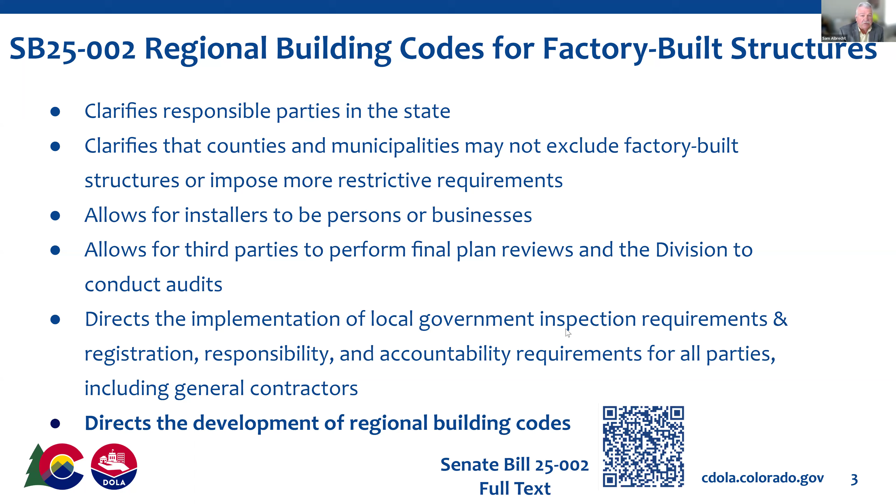Now, why are we here today? This is the biggie of the whole reason behind this legislation, and that is to direct the development of regional building codes. As you know, the state has about 320 different jurisdictions. Every local jurisdiction has their own wind load, snow load, and authority to approve that.

What we're trying to do is group those into common regions that allow the manufacturers to develop a single plan set, or a few multiple plan sets if they want to build into different regions, for an approved plan, right? Before we tied plan approval to a specific address, that's going away.

We will still require when that unit is built and delivered that a plan set is delivered to the state.

But again, with a third party, if you have a unit that you want to use in multiple jurisdictions and it meets the regions we're proposing, it can be used in a number of different locations, and you don't have to get it reapproved for each specific location. You've got it approved already by your third party agency or by us, and then you're ready to go.

Now, the design criteria for each region must include at a minimum wind shear, snow load, wildfire risk, thermal zone, radon mitigation, and automatic fire sprinkler system. So the devil's in the details, and we've been working a lot on this. We're going to show you a mock-up of what we think these draft regions are going to look like going forward, and then we're going to ask you some questions about where to draw the lines.

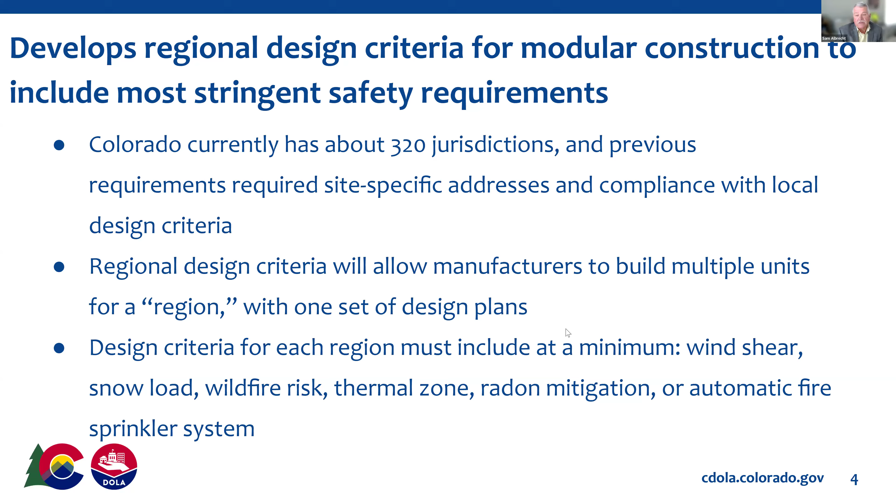Now, the Technical Advisory Committee is made up of 19 experts. They represent a lot of different sectors, and I'll show a slide on the different sectors they represent. The Division of Housing, that's me and Donnie and Heather, sitting back here working like ducks, looking calm and cool on the exterior and paddling like crazy underneath. That's what we do. So we've been working with the TAC very closely, proposing a lot of different options and collecting the information and the data.

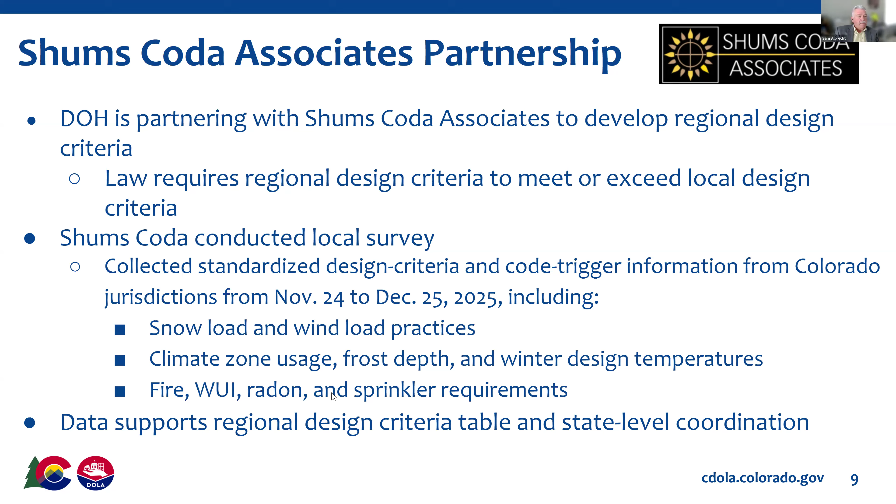Good morning, everybody. My name is Donnie Featherman, Program Manager for the Building Codes and Standards section. I monitor anything that comes into the state of Colorado that's factory built. So what I'm going to do today is just go over this table and then some of the footnotes that go along with it, and some of the data that was collected as part of the creation of this table.

But just real quick, to clarify, as Sam was saying, we're not creating regional codes. This is more of a regional design criteria table. We are going to have one code, and depending on what we do adopt, it looks like we're going to adopt the 2024 building codes, but that might change. It just depends on the feedback we get from the industry, and also feedback from TAC members, and then we'll see what we're going to do, at least with the code section. So the idea is to either adopt the 2024 building codes or possibly stay on the 2021 building codes.

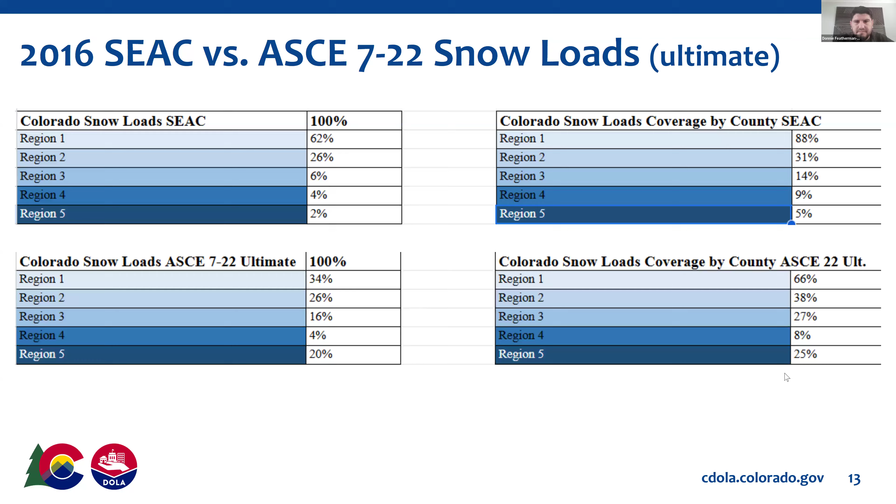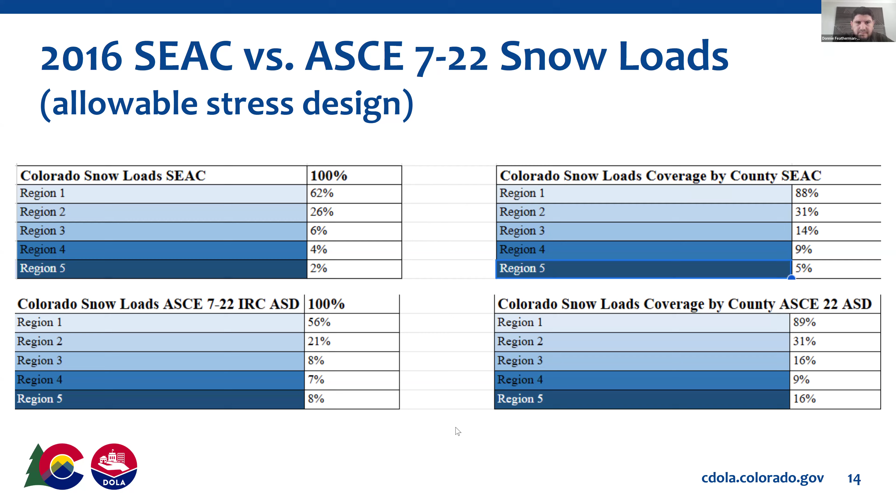So basically this is showing that a majority of the construction that has happened in the past couple of years fits within region 1, but you can see that it somewhat aligns with the data that was collected. A majority of the data collected shows that most of those points are in region 1, which correlates with the amount of approved commercial plans being in region 1 as well. When you compare the two tables, the way they're laid out aligns with the production models coming through to Colorado from the industry.

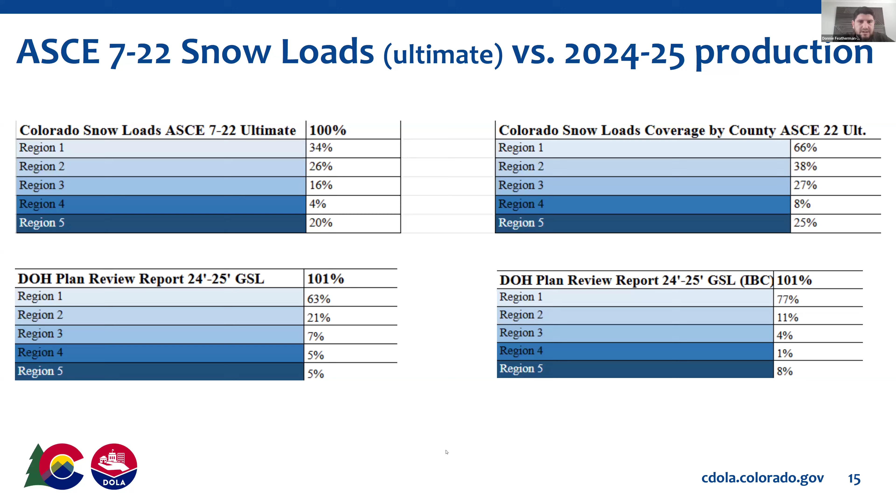So just for clarification, this is based on the past 2 years of production. Maybe industry demand is different, maybe there's going to be a lot more region 5s in the future, it's hard to say. But based on historical data, at least the past 2 years, the majority of construction is going to be in regions 1 and 2, based on the format of the table we currently have. This is just for snow loads though, just want to clarify that as well.

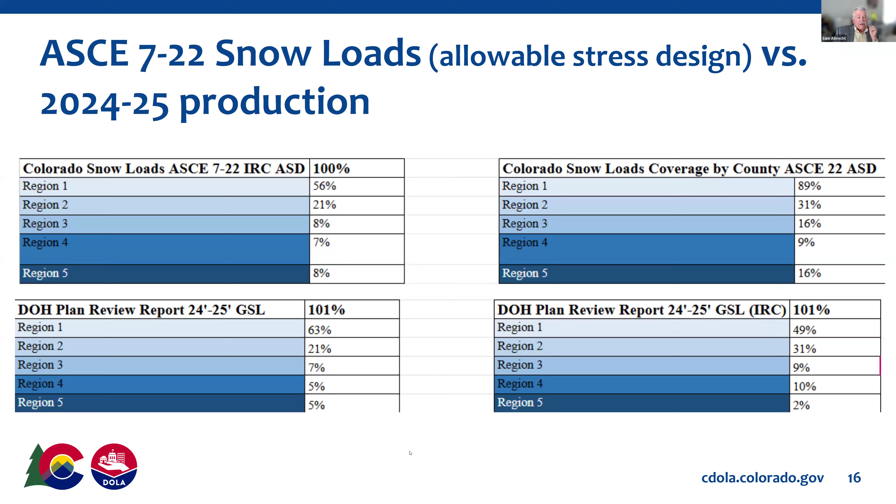So I've been trying to make some responses in the chat. Tracy, you had your hand up though. Do you want to just make your comments real quick or questions?

Nope, I'm good, I'm processing, Sam, because this is a lot for us tiny house folks. I guess I do have one question on wildfire mitigation. Correct me if I'm wrong, but didn't we discuss tiny houses being exempt because the square footage was less than, was it 300 or 400 square feet? I don't remember, is that not correct in my memory, Donnie and Sam?

We'll have to go back and look at that code, but I don't think there was an exemption on size there. Yeah, only the Colorado model solar and electric ready has a size requirement, which is the 600. Solar. Yeah, you're right, you're right, you guys. Okay, I'll just hush for a moment, I need to process. All right.

Trying to pick out questions based on a common thread here. If you would like to get your question answered, raise your hand or shout it out real quick. Sorry guys, I was trying to find the button for the hand but I couldn't find it. So I just jumped in. All right, the hand button is under the chat feature, I think. No, I don't know where chat is. Heather, help us out.

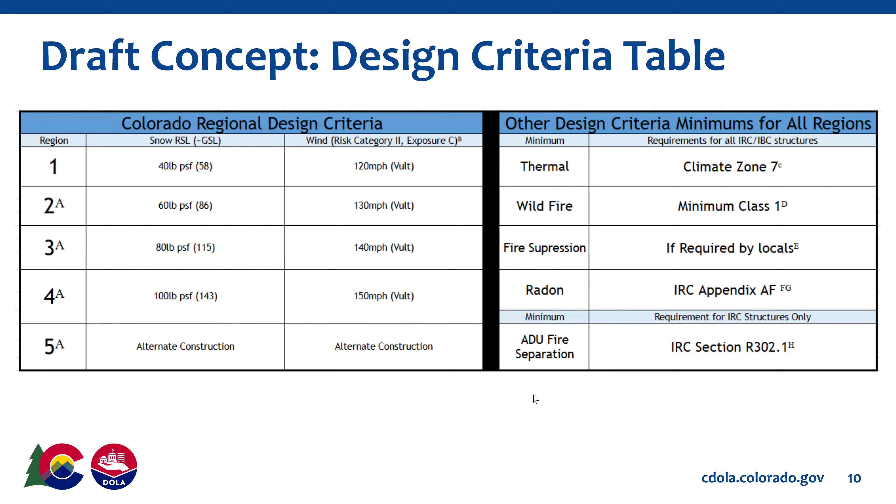Yeah, I just want to make sure, under the other design criteria minimums for wildfire, that footnote D was saying that you could have an approval without class 1 requirements. Yeah, as long as that locale does not have a classification of 1 or 2.

So what we're planning on doing is adopting the Colorado Wildfire Resiliency Code map. So you would be able to use that as reference, and if that specific location that the building is going to does not have a risk category, then you can design it to go to that location without it.

Also, you would have to check the local amendments because they might have an approved amendment that allows for a 0 classification. But how do you express that on the approval then, since it's not site-specific? Let's say you're only designing for a 0 classification, then you would just have to specify that the structure is only going to locations that have a 0 classification.

Okay, thank you. I think it's just going to be a little difficult. Have you looked at the current map? Yes, I have, and I started to check with local authorities on what they have or don't have. Yeah, a lot of locals have not adopted a WUI yet, so that might be a little difficult.

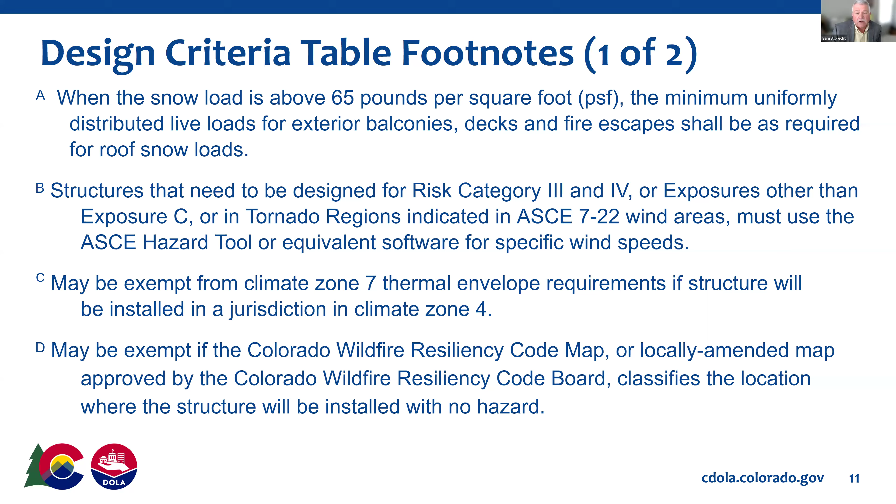Donnie, I want to cut you off. I want to go through those questions real quick and then do that schedule slide where I show everybody our timeline, okay? So please, if you have questions, email us or get the question to us and we will try to factor that into the next round of this. But I just want to go through again.

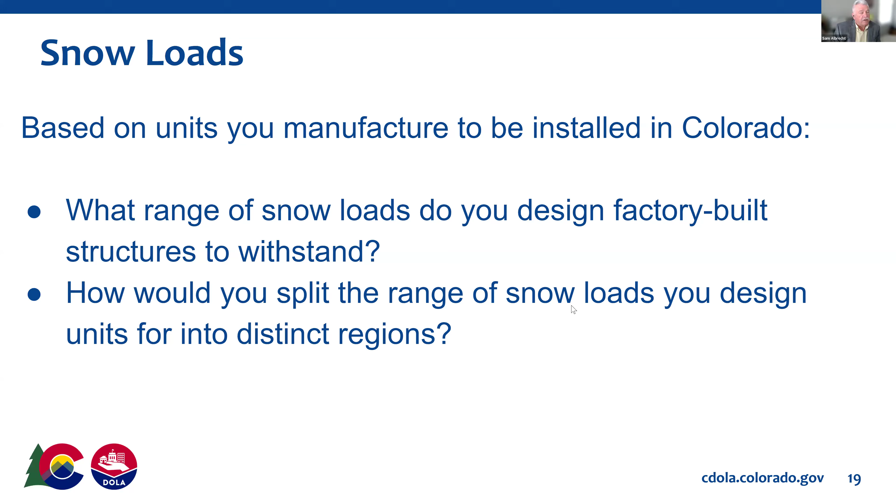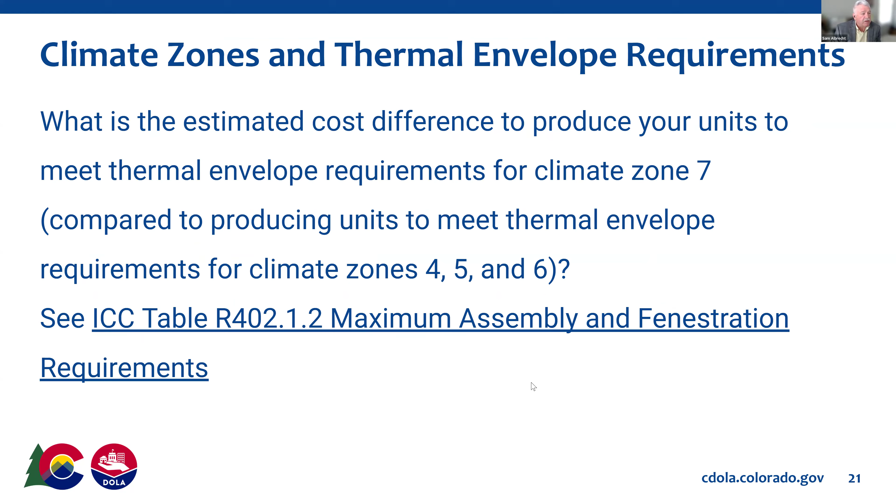Let me find the right slide. Based on snow loads, how does this affect your program? Wind speed, how does this affect your program, and where would you draw the lines? Climate zones and thermal envelope requirements—there were several questions in there about that. Please let us know the impacts to you.

A big one is the change to the 2024 code set. Are there cost implications and how are they minimized? At some point every state is going to go to the 24 code set or better. I'm just not sure how much longer. We're starting to see that in some of the other, not only jurisdictions in Colorado, but other discussions around. There was a Modular Building Institute government officials webinar the other day, and there are several states looking at the 24 code set, not just Colorado.

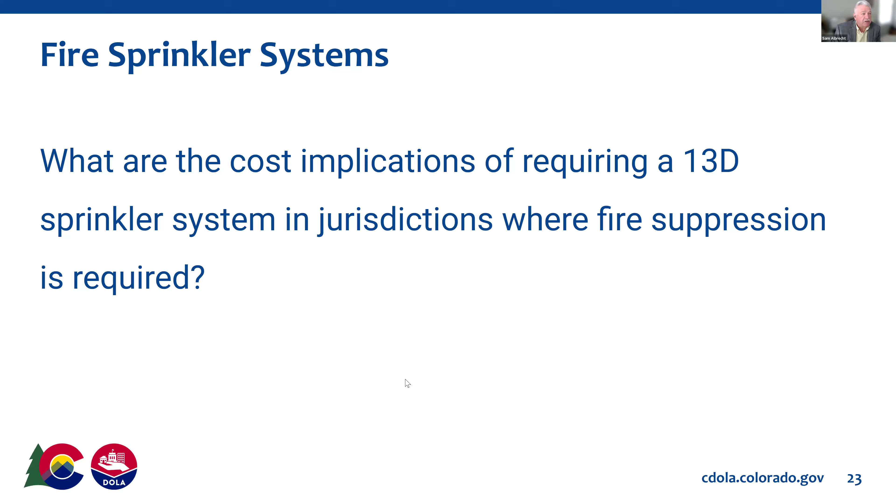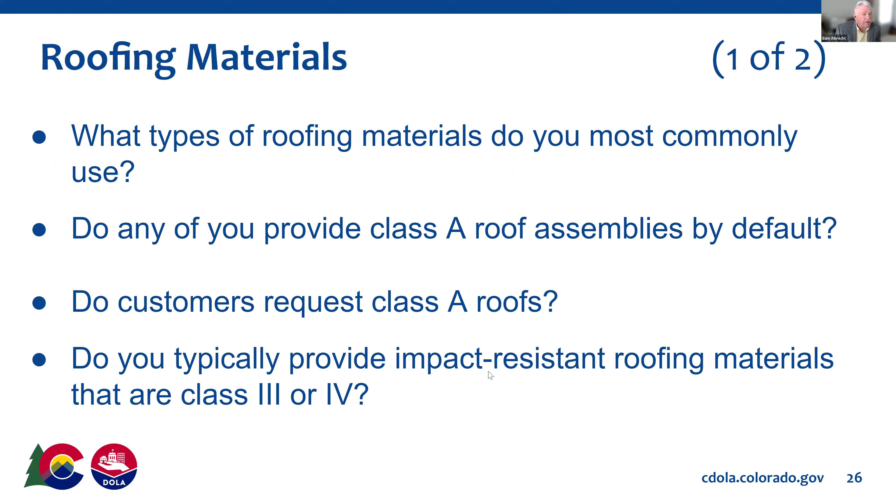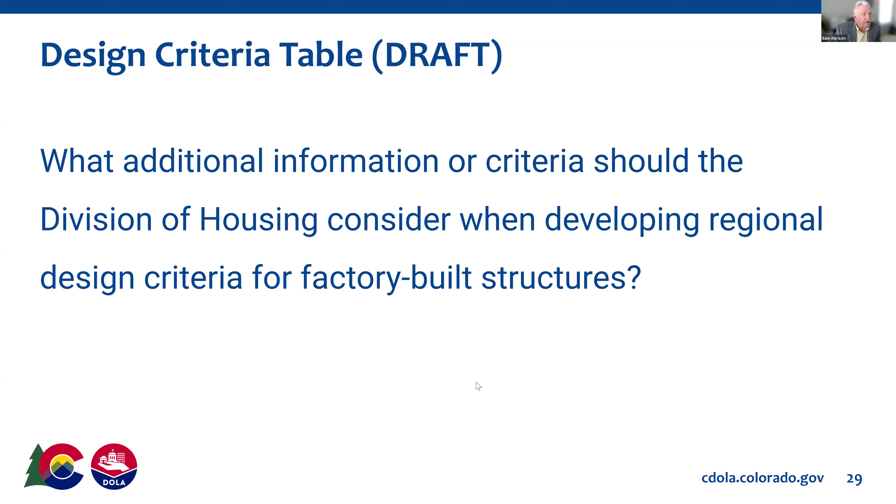Fire sprinkler systems, 13D, thermal bridging—questions about that, and roofing materials. What do you normally use, and what's going to be required? Do any of you currently default to Class A roof assemblies? More on roofing, and then any elements or information you'd like to see added to the table. We just discussed seismic, we'll probably get that in there. And that was it for that.

Now, with respect to the design criteria, your responses are needed ASAP. We're trying to freeze and finalize that table data by the end of the month, and that helps us meet these other dates. We will have more interested party meetings—this won't be the only manufacturer meeting. We plan to have one on the entire changes in Senate Bill 25-002 by interested party, very similar to what we've done in the past with updates to administrative rules.